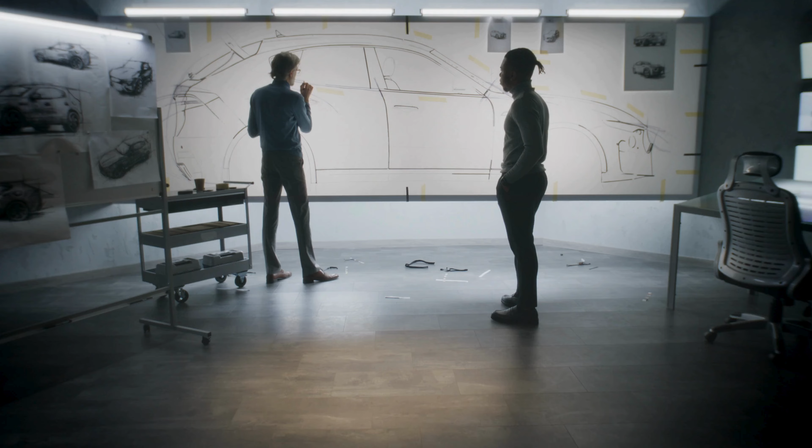Throughout my career as a design engineer in the automotive industry, working on some of the most advanced and elite cars, I cannot claim to have been a master, but I have had the privilege of meeting many talented engineers. Many are good engineers, some are great engineers, but only a handful stand out as true masters. Their impact on design and products is immense. These individuals are like beacons, guiding other engineers and pushing the boundaries of innovation.

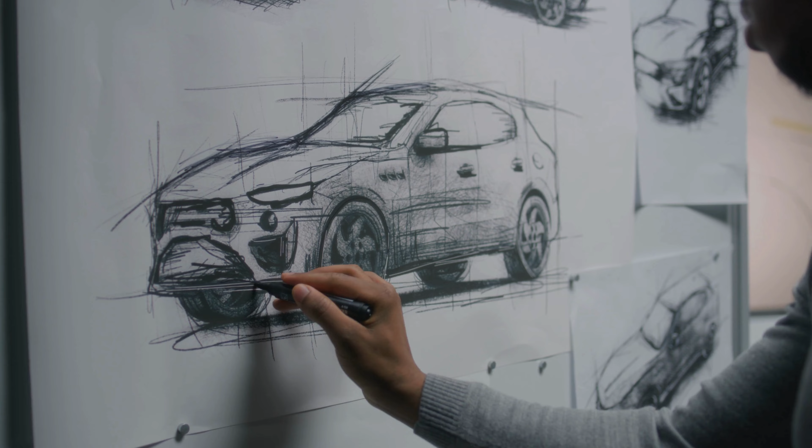I've had the chance to work closely with some of these masters, and I've always been fascinated by what sets them apart. Today, I want to share with you the secret to becoming a great design engineer. And trust me, the third point I'll share is a life changer. So stick around till the end. Here are my insights.

Number one, they put themselves and all their senses into the design. Great design engineers use more than just their brains. They use their entire being. They immerse themselves in the design process, feeling forces, understanding dynamics, and visualizing the behavior of every component.

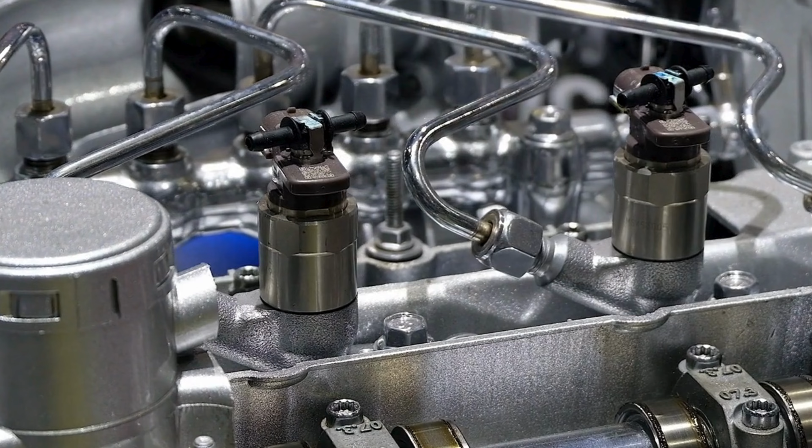Let me tell you a story. One time I was in a deep discussion with a master engineer about the force path inside a mechanical drive unit. I was using analytical methods and complex equations to figure out the force path and reactions, as any typical engineer would. But this approach was different to his. Almost instinctive was his approach.

He looked at me and said, "Imagine yourself sitting on a chair on this surface, holding a weight on top of your head. The chair is supported in these points and the weight is guided in that direction. If the weight is increased a lot, in which direction would you move?" I took a moment to visualize it, and suddenly the force path became clear.

That's the power of putting yourself inside the design by imagining yourself as part of the system, replacing each component with your own body and senses. You gain a profound and intuitive understanding.

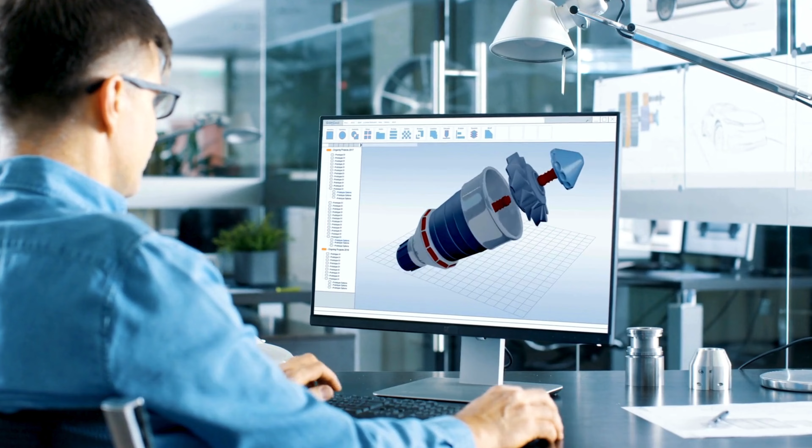On another occasion, a master designer demonstrated a similar tactic. He was asked if a torque of 80 Nm could be achieved by a specific drive system. Instead of running straight to calculations, he extended his arm, thought for a moment, and said, "No, that's not feasible."

When I asked how he knew, he explained, "My arm is about 80 centimeters long. Imagine I'm holding a 10-kilogram weight at the end. That's roughly 80 Nm of torque. I can feel it's too much for this system." His experience and ability to physically relate to the forces gave him immediate clarity. This is not to say that this intuitive approach replaces calculations, but paired with calculations, you are a lot faster and less prone to mistakes.

To be able to use this tactic, you need to train yourself to do so. Go over engineering statics and dynamics again, but this time from the very basics. Replace the objects that you are calculating by your own body. Step by step, gradually increase the complexity. It will become an intuitive approach to you.

Number 2. Master GD&T to allocate precision where it matters most. Another key trait of great design engineers is their mastery of geometric dimensioning and tolerancing, GD&T. This skill allows them to make functional features highly precise while leaving non-functional features less refined.

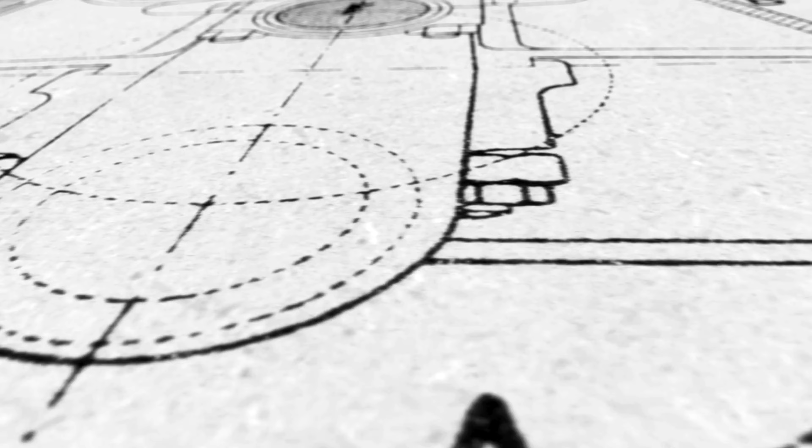The difference between a regular design and a master design lies in how precision is distributed. A regular design often applies a similar degree of precision across all features and dimensions, but a master design pinpoints functional dimensions for high precision while keeping irrelevant features rough. This strategic approach ensures that the available budget and resources are allocated to what truly makes the difference in the performance and reliability of the product.

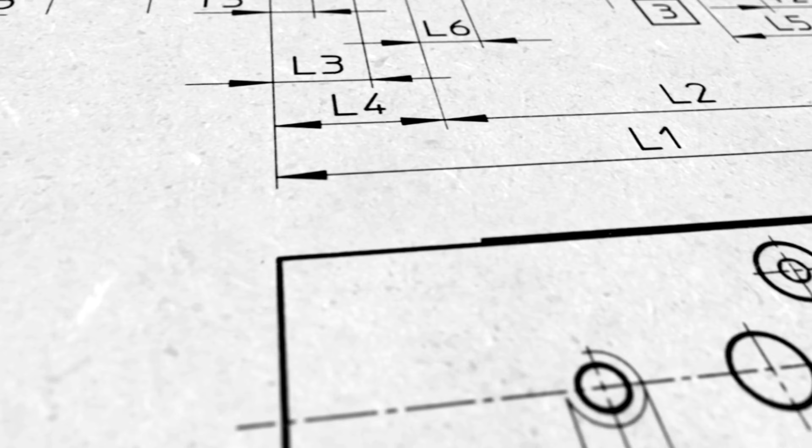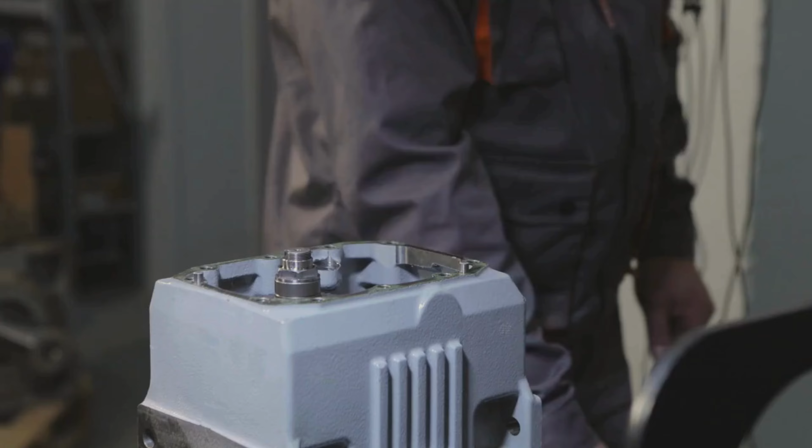Let me explain how GD&T gives you this power. It provides a clear framework to define the allowable variation in the geometry of the parts. By focusing on functional relationships, such as how two mating parts interact or how a specific feature affects assembly, you can achieve precision where it's needed most. This approach not only saves time and cost, but also enhances the overall quality of the design.

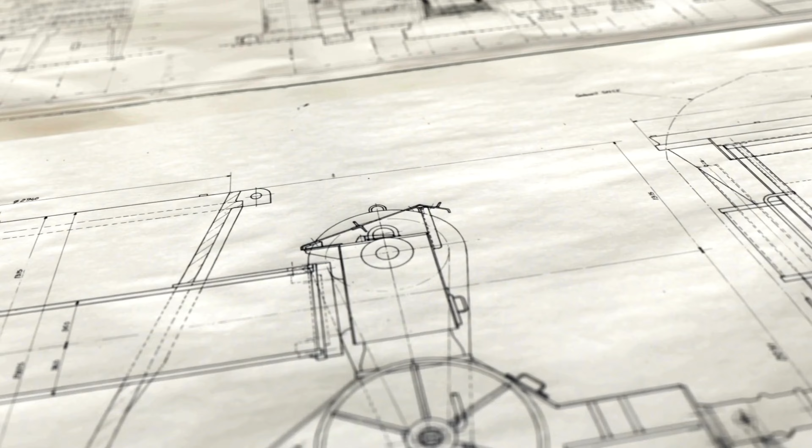For example, consider a critical mounting hole for a mechanical component. A master engineer will apply tight tolerances to this feature to ensure precise alignment and reliable performance. In contrast, less critical features such as cosmetic surfaces or non-functional edges can have looser tolerances, reducing manufacturing costs without compromising functionality.

Number 3. Use a matrix approach to generate concepts, a life changer for every design engineer. Good ideas may come by chance, but great engineers don't wait for luck. They create great ideas. They create them through a structured approach. One of the most effective methods is the matrix approach, which breaks design requirements into sub-functions.

For each sub-function, you list all the possible solutions, whether feasible or not. This brainstorming phase allows you to put every idea on paper without judgment. Once you have a comprehensive list of potential solutions for each sub-function, the next step is to start combining them into compatible solutions to generate several product concepts.

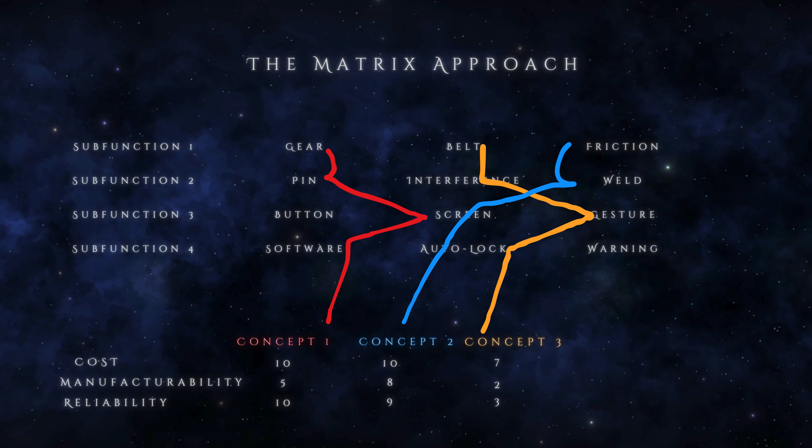To evaluate these concepts, master engineers use a parameter-based point system. By assigning scores to factors like cost, manufacturability, reliability, and performance, they can objectively judge and refine their designs. This approach not only ensures a thorough exploration of potential solutions, but also creates a clear pathway to the optimal design. By systematically assessing problems and exploring solutions, great engineers consistently produce innovative and efficient designs.